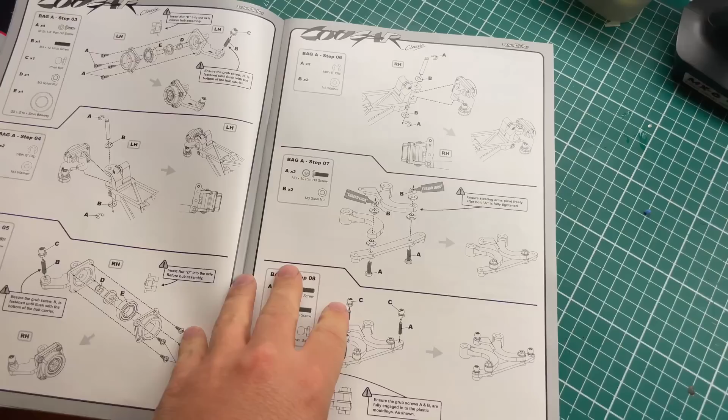Okie doke, so here we are, a semi-tidy workbench, well at least there's a little bit of space. Today's project, we are starting on the Cougar Classic. Really like the manual, having a quick run through it looks like it's going to be a pretty straightforward build. Obviously nowadays these parts tend to come as one piece, whereas here it's made up of several pieces that you need to screw together. But having a quick scan through the book, it looks pretty straightforward.

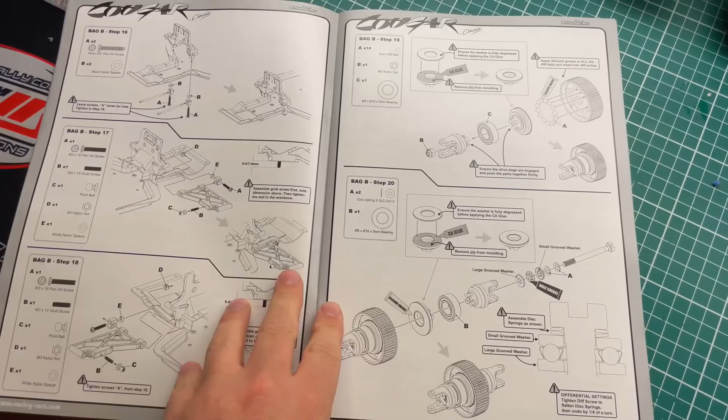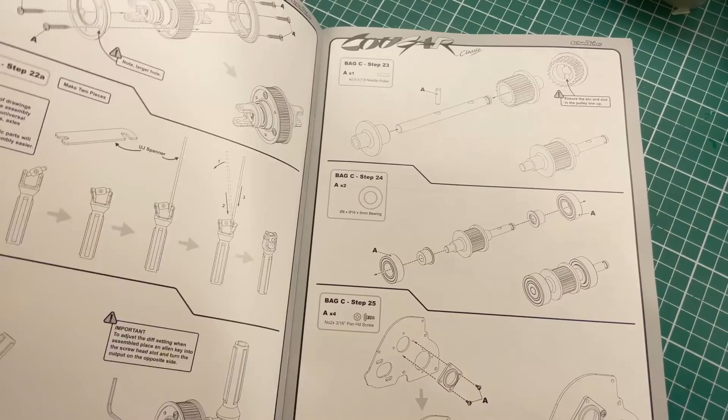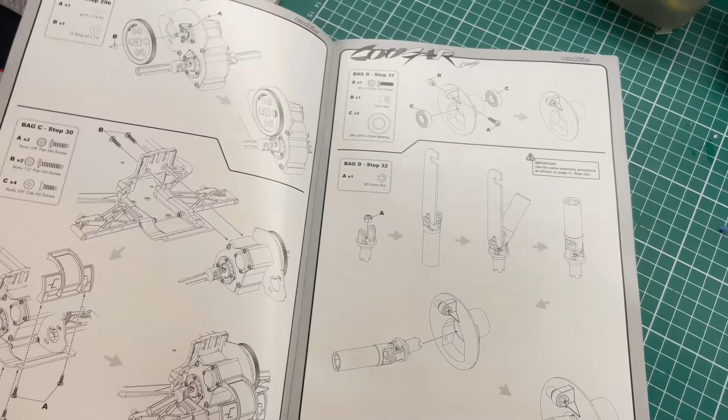I have noted that on the screws, as you can see here, they're not hexes like you get with modern cars. We're back to a Phillips driver for those, so I need to make sure I've got the tools ready. Yeah, looking forward to this build. Anyway, that's enough of the manual, shall we get inside the box and get this thing built?

So first step is really to get all your bags ready. What I like about these is they do it in steps, so you basically work your way through the bags, different steps as we go through. Here you can see we've got step 37, bag D. So I'm going to be looking for the bag A bag, which is this one here. Obviously this is step 1, see step 3 there. So I'll start off with one bag open, work my way through the steps, and then work my way through the rest of the box.

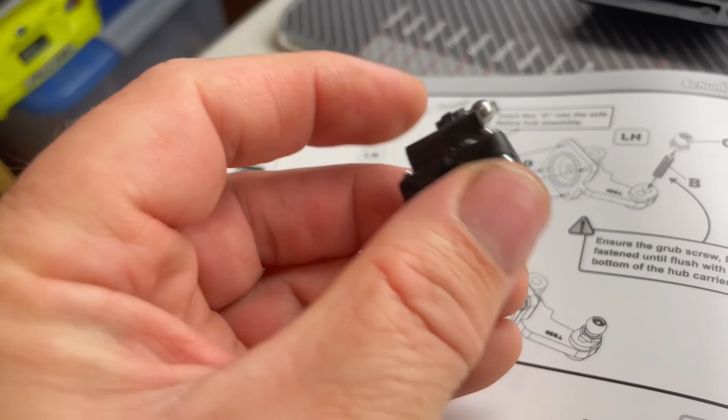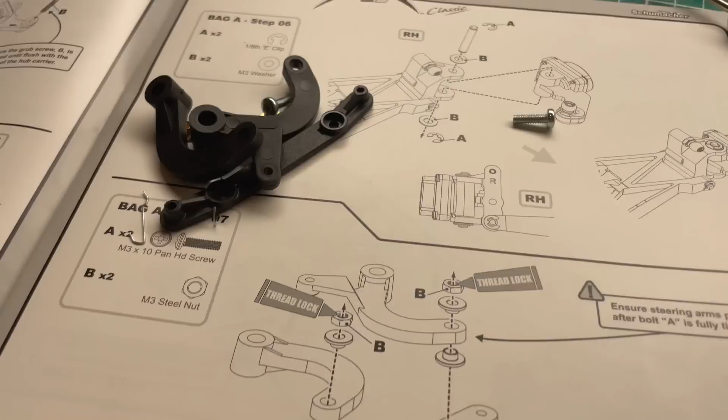Here is the bag that has your thread lock and grease and bits and bobs in, which you will need for this step, because what we're going to do is add thread lock, and this is the steering Ackerman that we're about to build.

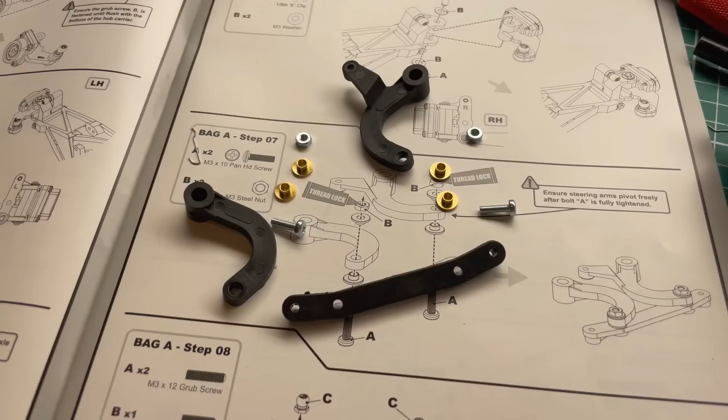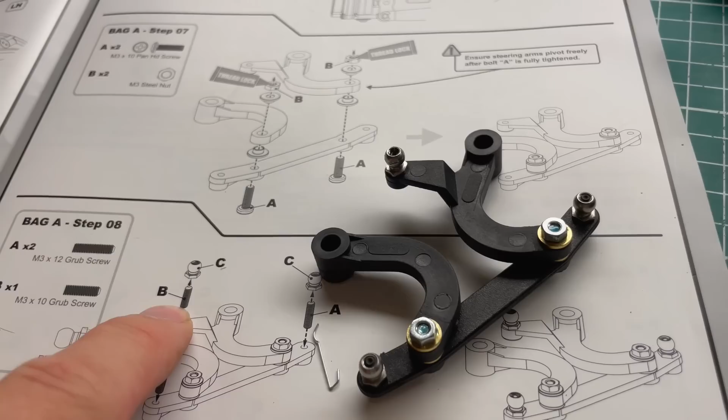So again, I've made sure I've got all the parts that I need for each side, and now it's time to screw it all together. Beautiful. Worth noting on this, obviously we've got the 3 ball studs that have gone on. You've got 2 slightly longer grub screws, this one at the back here is a shorter one. Make sure you get those the right way around.

Okay, so that's that part done. This is actually the fiddliest part of the car so far, because when you're putting it together, you need to make sure this goes under here before you clamp it all down. So try and follow it as it is in the picture, and it should be just fine. So that is all good.

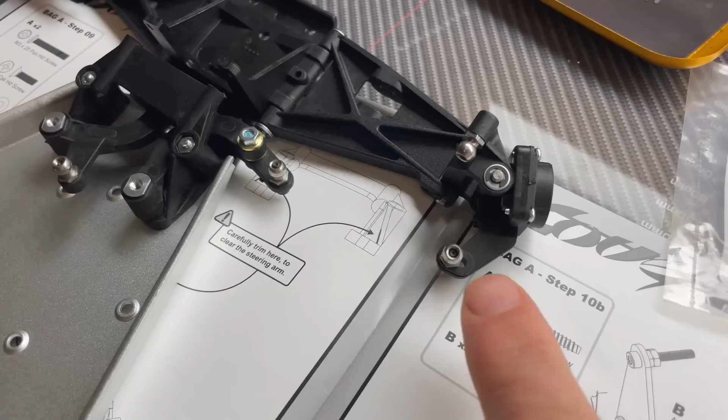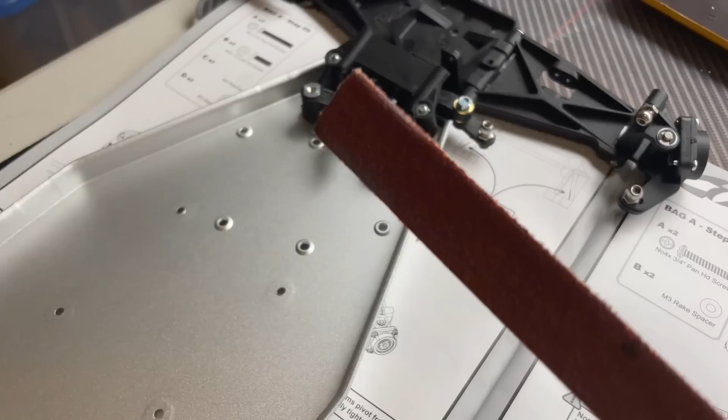On here it talks about filing away to clear the steering. I've just checked mine, it looks like it runs perfectly. All I used was a file, and I just filed the tiniest amount of plastic down so it fits in without any issues. Okay, so next up it is putting the front suspension mount onto the car.

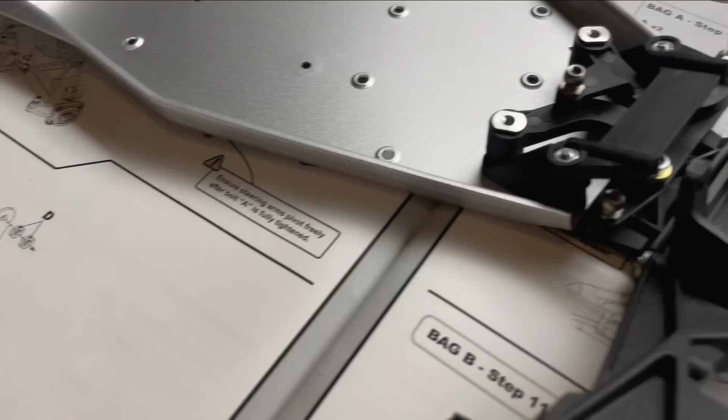There it is, front end almost done. So we now have the servo put in. When putting the servo in, you keep these plastic parts sort of done up loose, so when you put the servo in, you can set it up and then tighten it down.

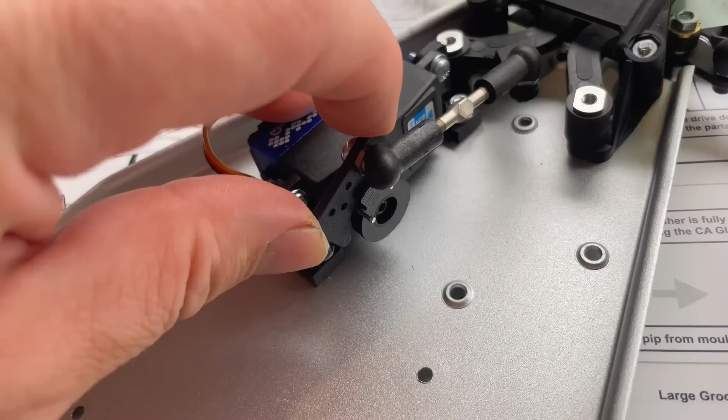The servo saver, where to start on the servo saver? I'm not a massive fan, to be honest, and there is a lot of slop in this servo saver, and I'm not sure if that's supposed to be there or whether I've done something wrong.

Okay, so problem solved. You can see now there is no slack whatsoever. That is rock solid, and the reason being is it was this wire here which I'd put in wrong. So it is important that you cross these two over in order to get that servo saver action to work well. So that is pretty sturdy now.

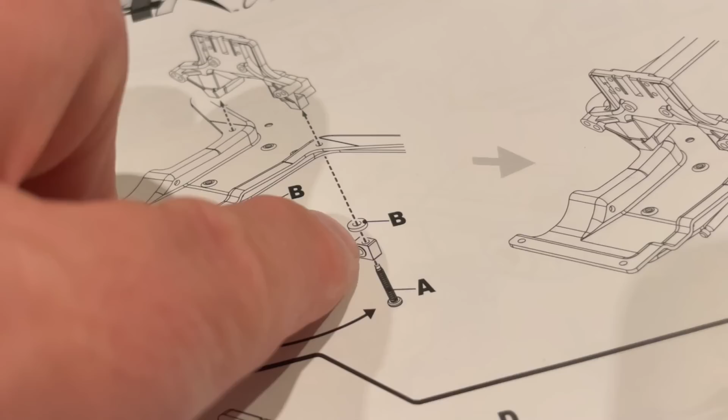Front of the car is complete, and now we make our way to the rear of the car, and let's get building. So this bit here looks nice and simple, but it is very important that you put these into that hole first, then screw this through to hold it in place, and then you can attach it to the chassis, and when they're done they look a little bit like this.

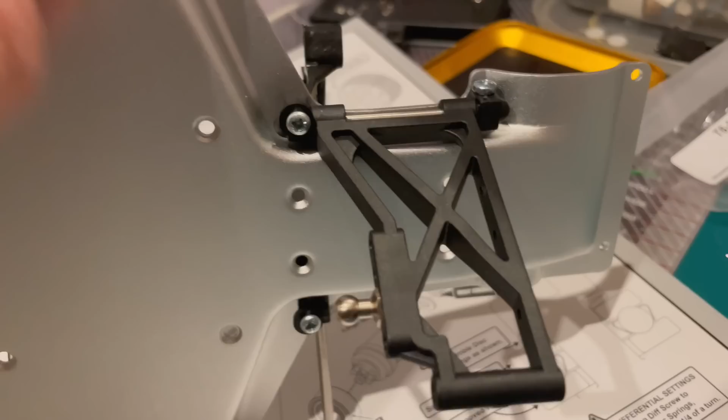Obviously we've got to do the other side, so as you can see down here, that one is attached. I've left it loose so that I can put the arm on here, then I attach the other end, and then I screw it to the chassis. But it's pretty straightforward stuff.

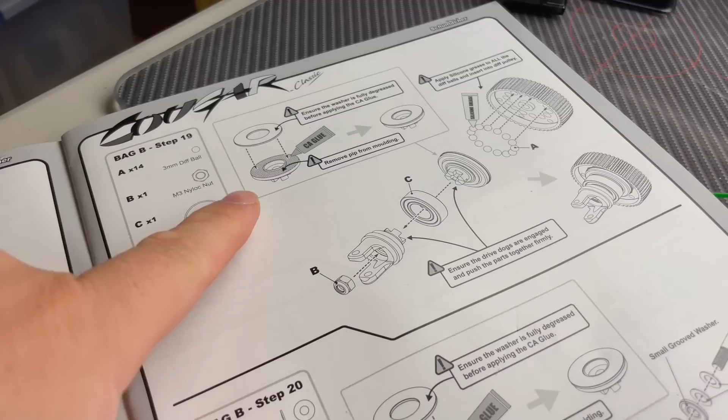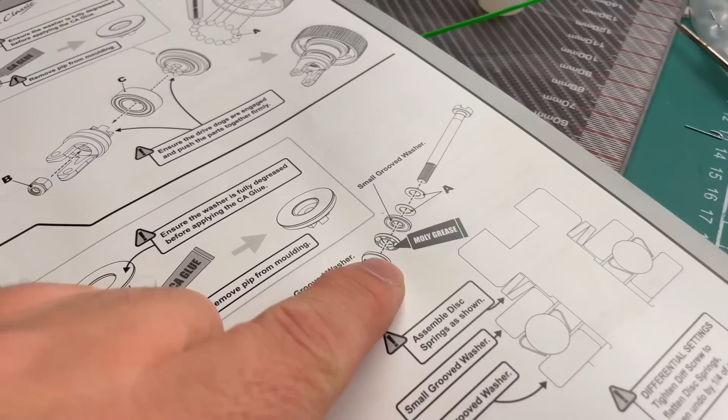So worth noting at this stage, CA glue is super glue. So we super glue that onto there, and we've got the silicone grease, which comes in a little pot. What have I done with it? There it is, got a little pot of silicone grease, and then we have got this one here, which is the moly grease, and the moly grease goes in between these, which is what I'm doing at the moment.

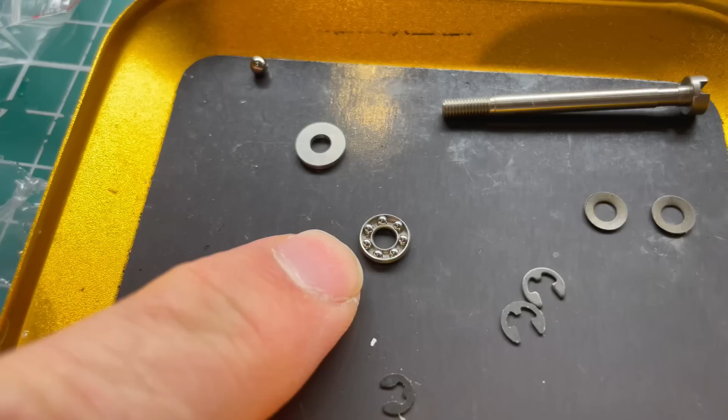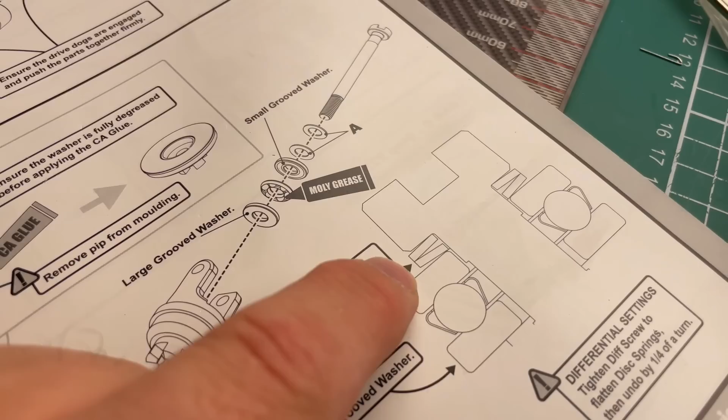I've put the grooved washer in there. The next one to go in is this one here, and I'm going to top it off with that one, which is another grooved washer if I turn it over. And then we've got these two here, which are a slightly different shape, and what you need to do is make sure they look like that when they're in there. So it depends on which way round they need to go.

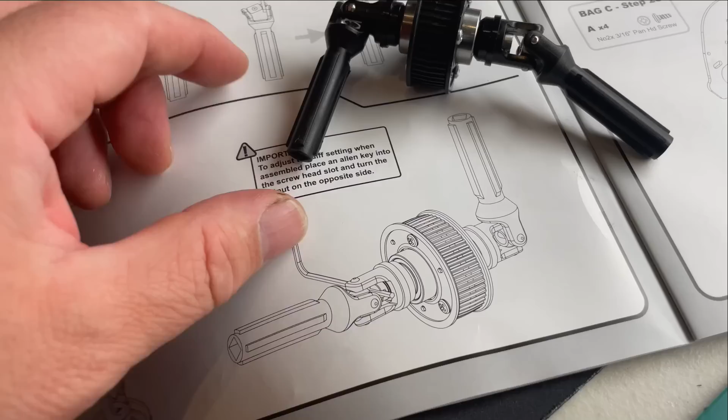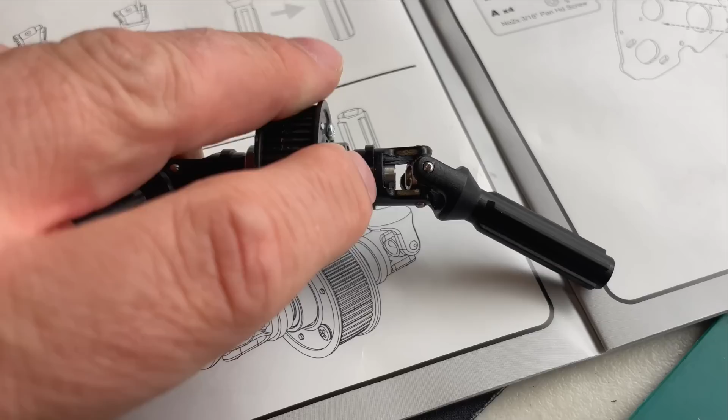I'm not going to lie, putting these bits in was probably one of the most challenging parts of the build at this point, but they are all in there now. As you can see, you can use an Allen key to tighten up the diff, and you've got the screw there that you just need to put the Allen key into. It's just in there. Yeah, on to the next phase.

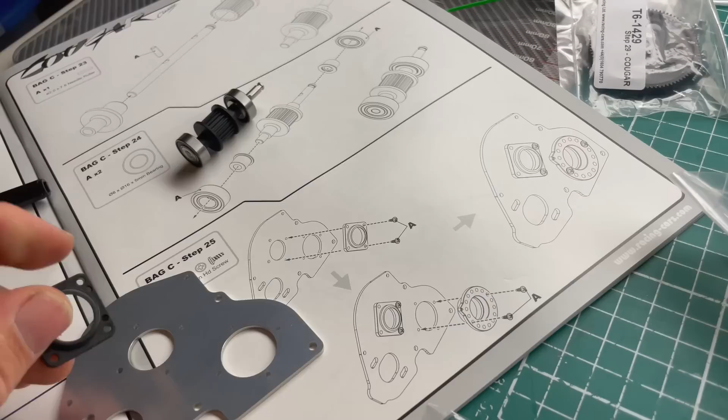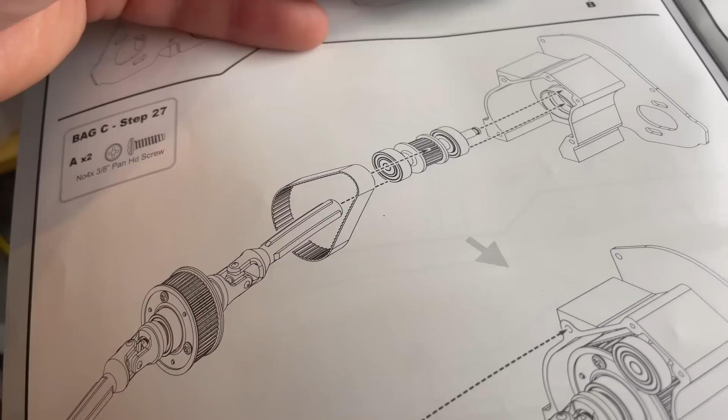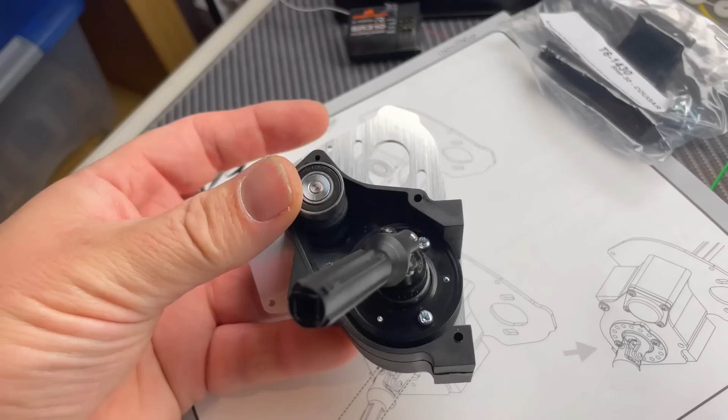Okay, next up we're going to put the belt in place and start putting this thing together. So that actually went together quite nicely. I'm holding it all in place because if I don't, this bit's going to fall out. But let's get the top on and get it all sealed up.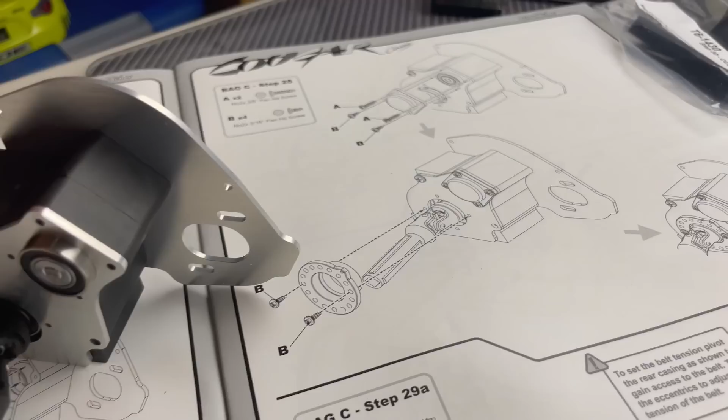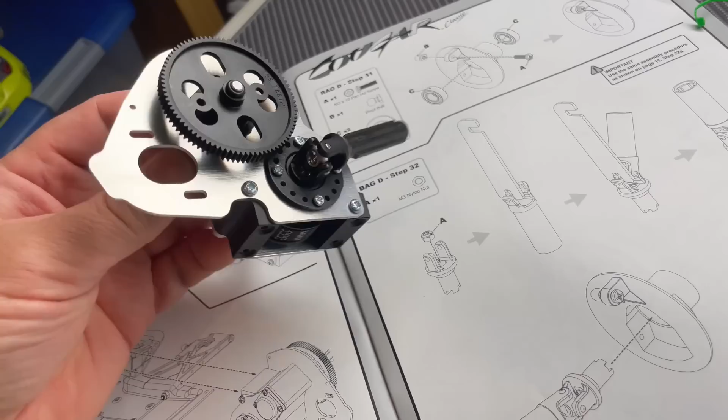So once these two screws are in, it's all held together. Now we just need to put these covers on and finish it off. And there it is. All done and dusted. So the next step is to get this in the car.

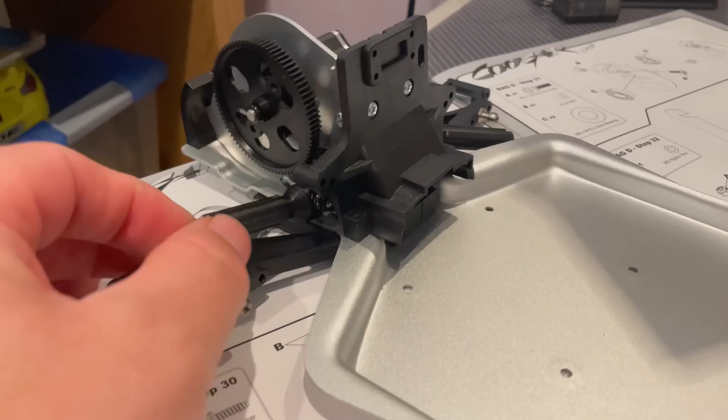The car's really starting to take shape now. Front end's pretty much done. With the rear, everything's in place. We just need to now do the uprights here and connect the wheels and then basically just finish off the car. Then we're going to look at putting the electrics in. But we are on to bag D.

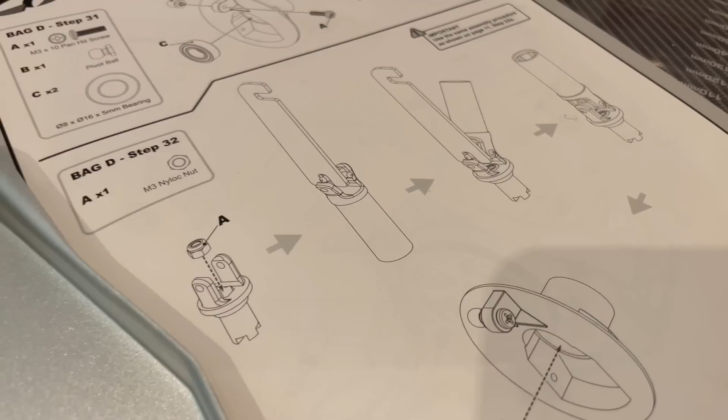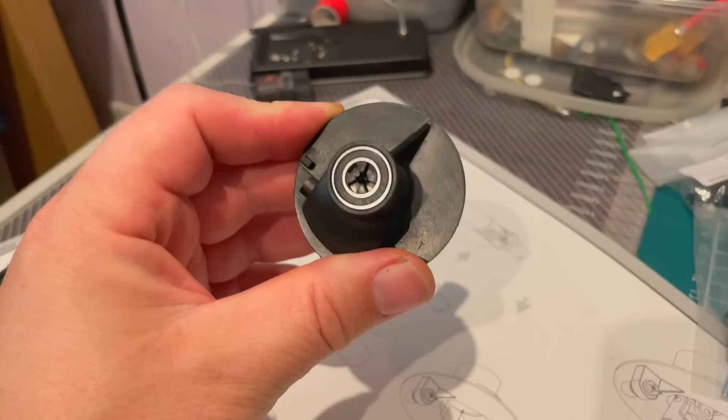This remains one of the most frustrating parts of the build, trying to get these in. But we are getting there, and when you put it all together, you end up with one of these. So as you can see, the way the wheels mount to these is very different to the modern day hexes that we're using.

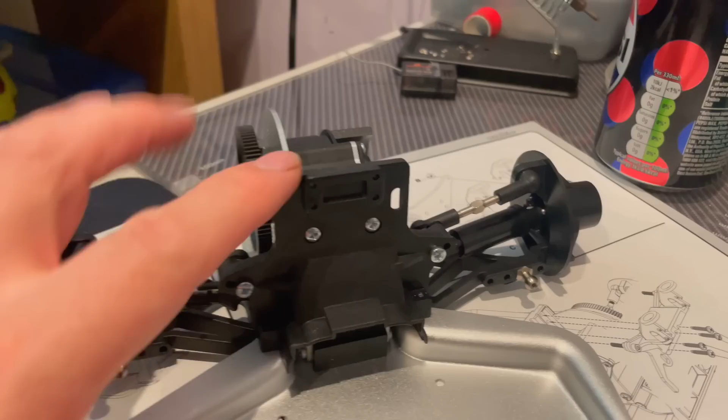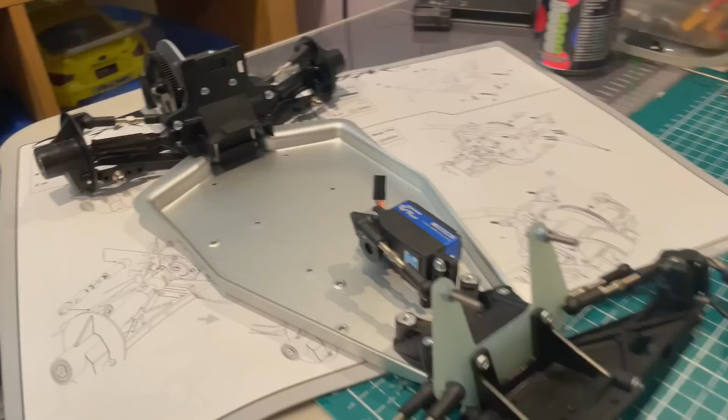So build up to now has been going fantastically well, and I've come to my first issue, and that is one of the screws which has been supplied hasn't actually got the thread on it to screw in. So unfortunately it's a dud screw. So I need to go for a hunt, see if I can find a screw that will fit. Maybe once I finish building it, there might be some spare screws in the set, but with regards to the build so far, all very positive.

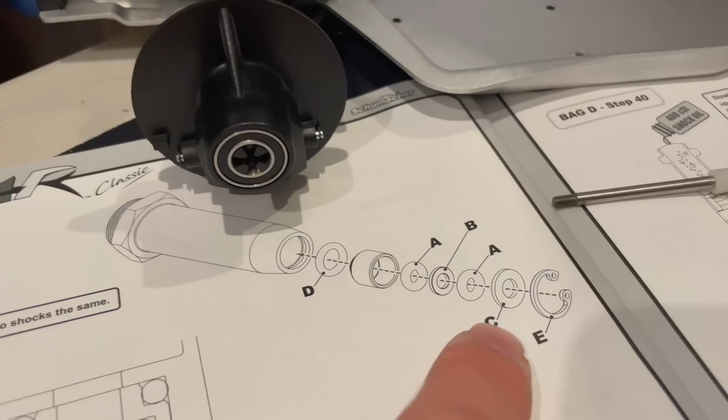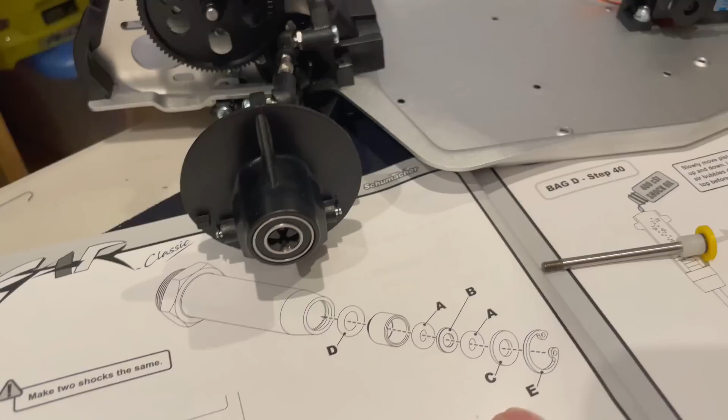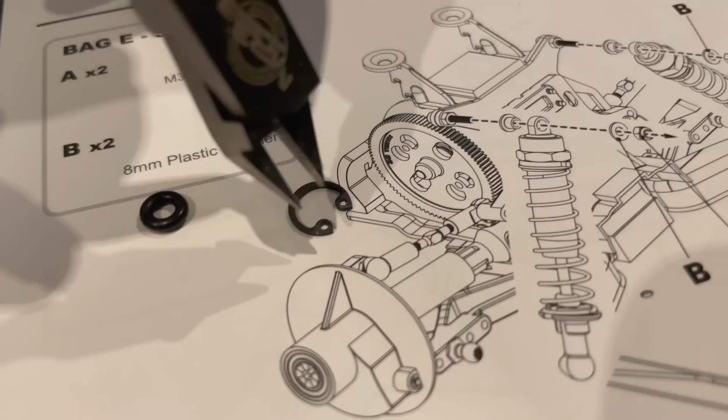This section looks pretty straightforward. Make sure you push this one all the way in, pack those into this bit, then push it in as well. Place the spacer on top, and then it comes to this clip here, the E-clip. If you haven't got the right tool for it, what you might have lying around is a set of cutters like these. What I've found is the end of these is just about small enough to fit into the holes so you can push that clip in place.

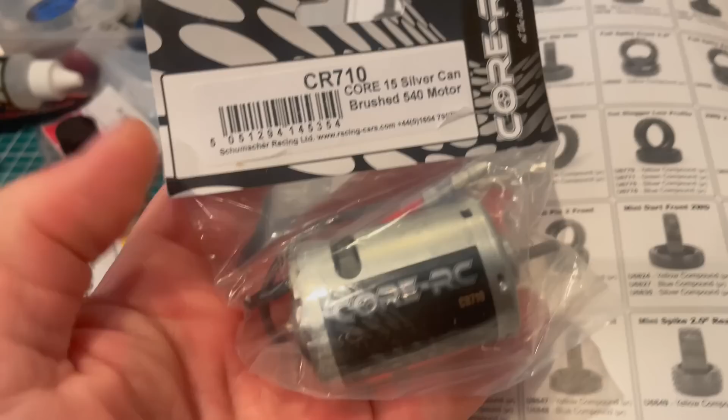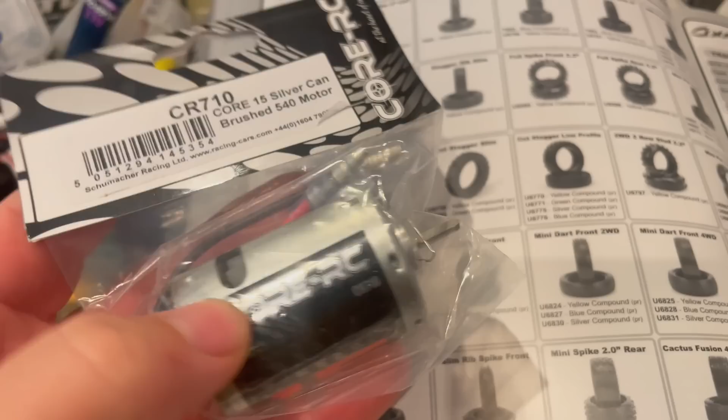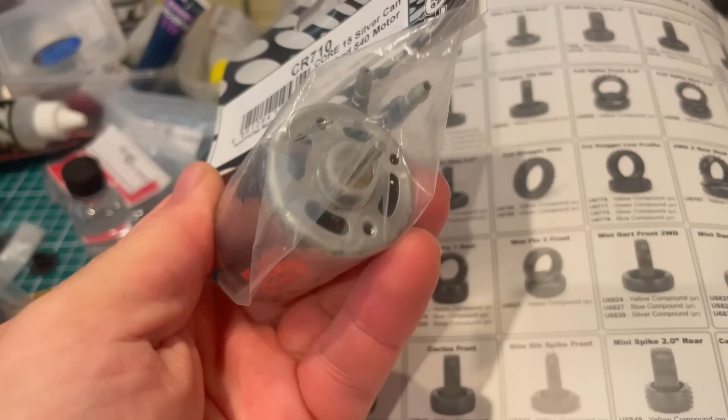For electrics, we are going with this - a Hobbywing 1060 brushed electronic speed controller. Super simple, super basic. These are what we run in most of our touring cars. A version of the 1060 is what comes in most Tamiya kits these days.

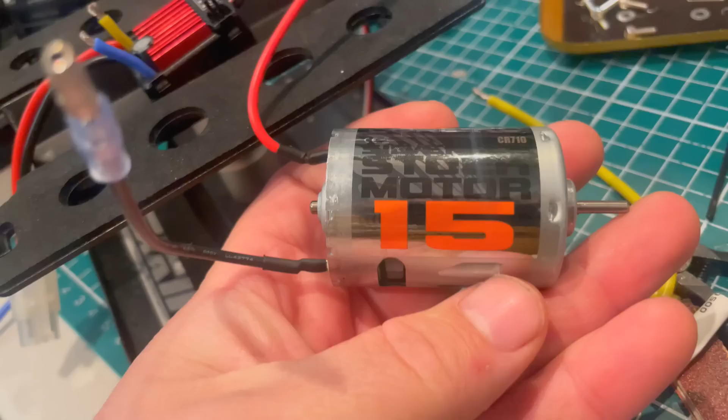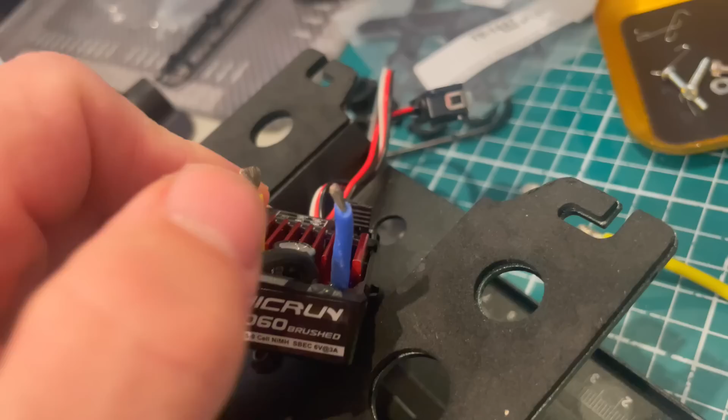So here's the motor. As you can see, we have red and black leads coming out of it. Red is denoted by the red dot. Often you have yellow and blue, and the yellow would also be on the side of the red dot. So if we look at the ESC, you can see I've just chopped these wires down. We've got our yellow, which is the same as the red here, and our blue, which is the same as the black on the motor.

What I'm going to do is put some new wire in, like so, and solder straight onto the motor, because in the past these little plugs you get on the motors and ESCs can sometimes get a bit hot, sometimes come a bit loose. It's perfectly fine to use them, I just prefer to bypass those and solder straight in. It's not something you have to do, but I just prefer doing it. So let's get this soldered up.

I'm actually going to use yellow wire for both, which means I'll have to mark these two. I've kept a little bit of blue at the bottom just so I know which one's which when it comes to soldering onto the motor. On this ESC we also have a Tamiya connector. Once I've finished building the car, I need to look at what batteries will fit in. I'm thinking these are going to get turned into bullet connectors, either 4mm or 5mm, depending on the batteries I choose to use with this car. So these also need to be fixed up.

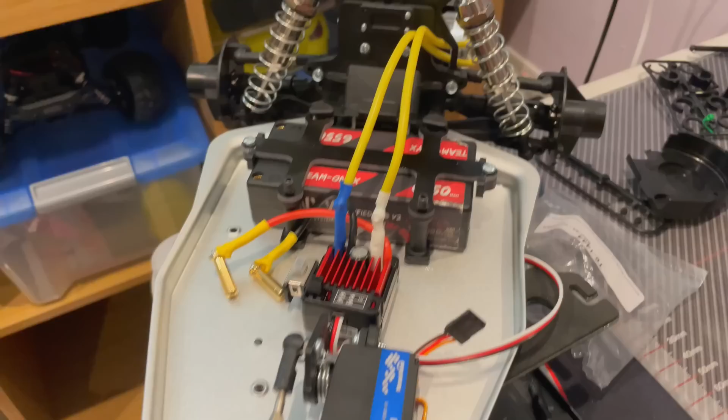Now, if you follow the manual, this is how the car is going to be laid out. Obviously we have our servo, our electrics, and our battery at the back. However, there are these extra two holes here, which I think allows for the battery to be set a little bit further forward. I'm not sure if that's an option - it doesn't say it in the manual, but I might have a little look and see.

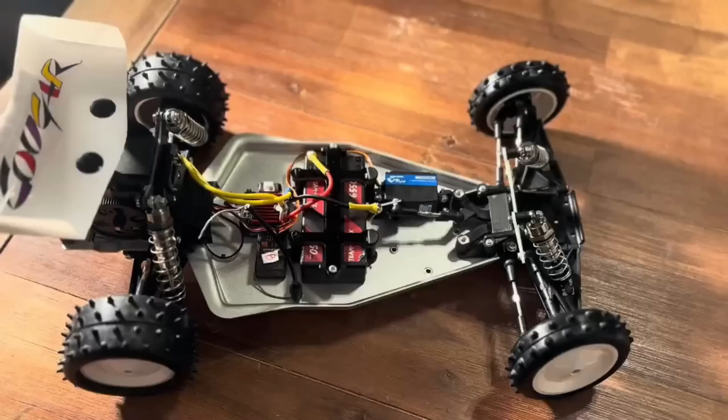So there it is. I haven't put a pinion in it yet, so I need to do that. I need to work out what gearing to run. I've also got to get the other wheels sorted out. Obviously, when you're running indoors on carpet, some clubs don't like using these spiky tyres, so I've got some modern wheels sorted and need to get those made up. But it's pretty much ready to go.

It looks really nice, and well done to Schumacher for creating a build that hasn't changed. Looking at your video, I'm really looking forward to it. Do you know what I'm not looking forward to? The ends of my fingertips bleeding.

What, E-clips? But they've left all of those quirky little bits in this kit, and I think that's a really good thing. For me, nostalgia-wise, it doesn't get better than this car, so I'm thoroughly looking forward to building mine and racing you, and beating you again. You ain't going to beat me - I'm going to have weeks and weeks head start, because I might get 60 laps in this week, and you haven't built yours, so I'm 60 laps ahead already.

Before we sign off this video, I've just read something on the back of this box. It says here, ball differentials invented by Cecil Schumacher in 1978. I was one year old, and Cecil Schumacher was messing around with his balls. There you go.